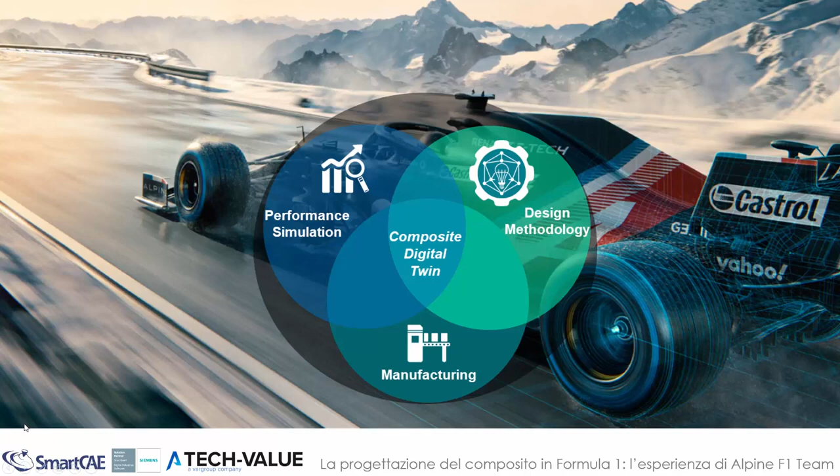Yes, thank you very much for the introduction. It's a pleasure to be here today as the guest, invited to present to you a little of what we do with composites in Formula One. We've been using Fibersim for many years, and I will go into this in more detail and try to give you an insight into how we engineer our composites.

As mentioned, I look after our technical and innovation partnerships, but my history in Formula One was first as a Formula One engine designer for around 10 years, then I moved into composites design, looking after chassis laminates for many years, spending over 10 years on the Fibersim process and chassis design, and then moving on to many other composite parts, as I'll touch on in this presentation.

So very briefly, Alpine. You may better know us as the Renault Formula One team in recent years. For this current season, we are now rebranded as Alpine, the flagship car brand of the Renault Group. Alpine is effectively a standalone brand within that infrastructure, a relatively small sports car manufacturer, but with big ambitions for the future. So this is really the direction we're going.

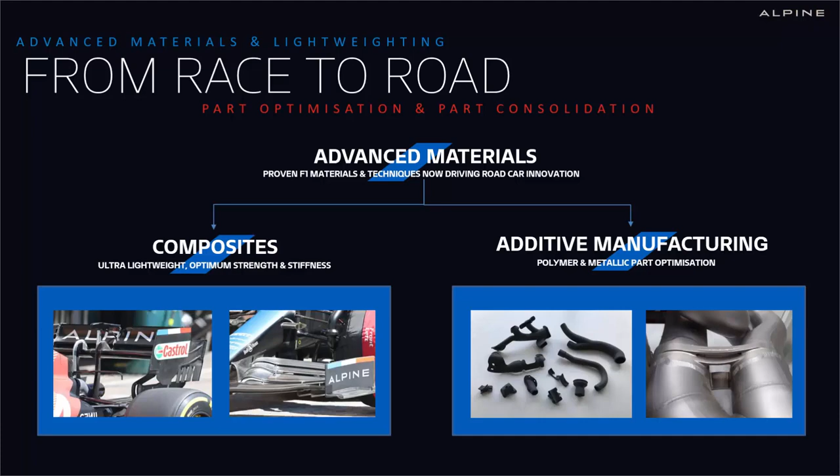But the big story here is composites - the lightest of all, the best specific strength of all the materials, but really the design creativity to do something different. We're not just going to take a metallic part and recreate it in composites. We can actually think very differently and very creatively in how we work with a composite material. And that's really where Fibersim starts to help us visualize this process. But these are exotic materials, right? So yes, they've got a place in F1, they've got a place in aerospace, but what about more mainstream areas? That could be automotive, it could be wider infrastructure, transportation.

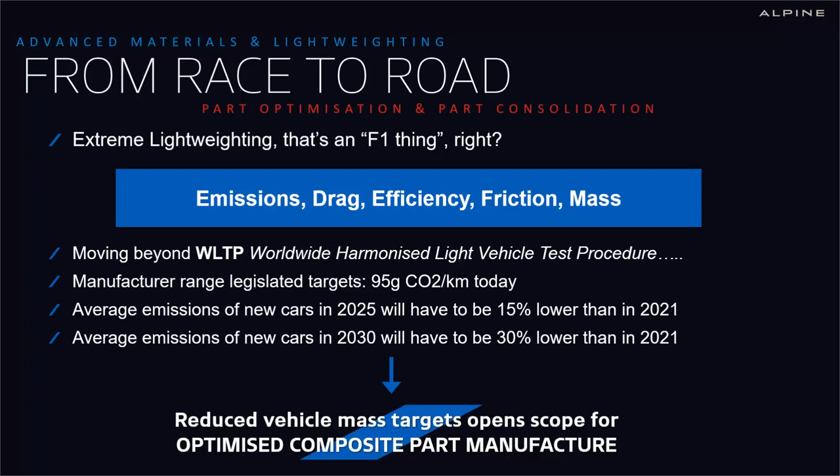I guess this automotive story, as I've mentioned with Alpine, is clearly the direction that the automotive world is taking today - very aggressive international legislation, sustainability, clean emissions, push to electrification, lower carbon emissions from traditionally powered vehicles. All these mean very aggressive weight reduction targets for the auto manufacturers. So naturally, this is where the audience here, representing the composites manufacturing industry, are really in a strong place to help the automotive OEMs looking to make this move to composites. How can you help engineer these parts so that the world's automotive can lose 20-30% of a vehicle's weight? Very aggressive targets, and only realistic if you start to look at something like composite materials.

So let's take a look. What is this Formula One composites process? What makes it so different? How does Fibersim really help us be more creative, really drive that competitive advantage? What does it do for us?

As I mentioned, I've been doing this a long time. I think one of the hosts on this call kindly likened me to the Cristiano Ronaldo of Fibersim. That might be a bit too much of a stretch, but I guess I've been doing it for a long time. Way back in 2007, I got involved, but that wasn't the start of our Fibersim story. I was actually the third Fibersim user in this team.

We had the software, we were kind of getting our heads around what it could do, but what we really thought way back in that time scale was, how do we really embrace this tool? What can we push the limits to? What can it really do to help us drive the performance of a composite Formula One car?

So again, materials, yes, there's lots of exotic materials. Why above all do we put so much emphasis and resource into composite materials? Composite materials in a Formula One car make up about 80% of the F1 car by volume, but that only accounts for 20% of the weight of the car. It's those kind of ratios where you start to realize that engineering investment in composites is so much more important than all of those other exotic aerospace materials.

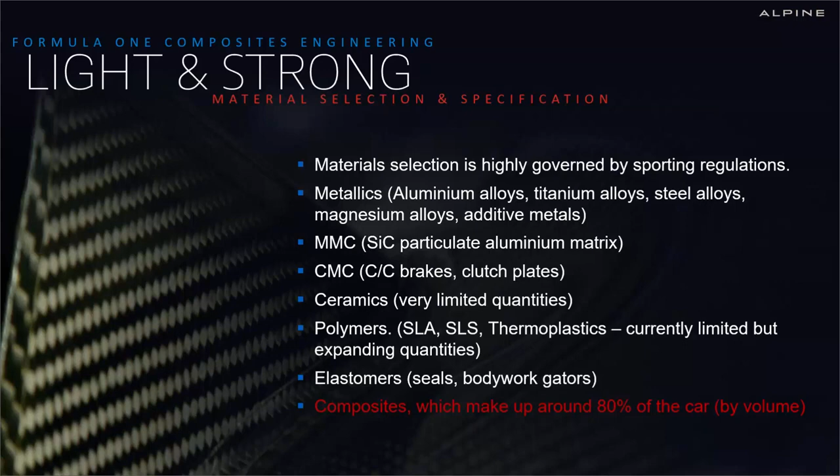Composites really does let you do things differently, as we've obviously come to learn in Formula One. The other big story, if you look back at the history of what we've done with composite materials in Formula One, is how you slowly re-engineer parts to be composite parts.

A lot of this can come down to part simplification, part consolidation. Can I take a traditional metallic assembly of 10, 20, maybe more parts and consolidate those into a single composite part? The geometry limitations, the complexity, the things you can do with the forming of composites really means you can have a fresh look at how you design things.

Obviously part consolidation, reducing the number of individual parts, reducing the assembly, actually helps offset a lot of the costs of the composite materials in the first place. So the net change in cost isn't actually as extreme as you might think when you start to re-engineer composite materials properly through this whole digital life cycle of what the part is.

So the process. What to us is the workflow of composites, and how does that relate to you, the audience, in doing very similar processes? I guess whichever industry you represent, the process will start with some kind of design evaluation. For us, that's the aerodynamic definition of the car.

In our road car industry, this would be the styling process, effectively defining the shape, the form of the finished vehicle before we then start to look at the structural properties in the full-scale design. This is no different to any other industry. We go through design, stress analysis, CAE round trips, the normal iteration to really optimize the design.

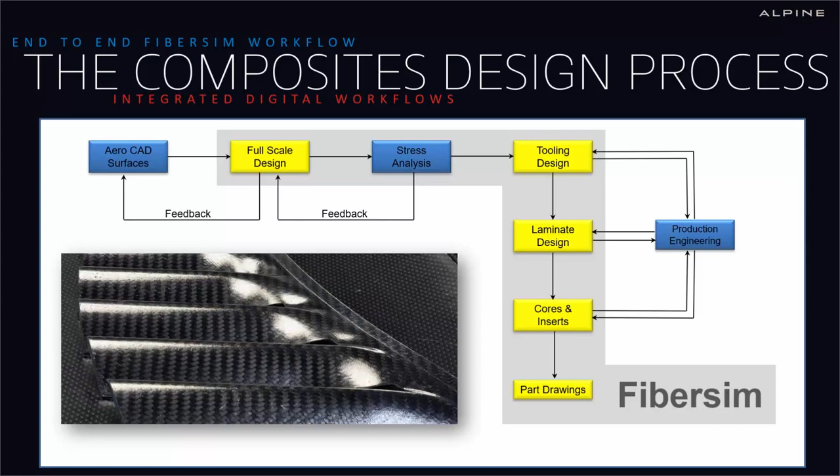And we're no different to you in the way that we manufacture these parts. We're still talking about hand layup, pre-preg materials, very skilled laminating workforces. So you might think that's very non-digital. So what we're talking about here is how to introduce a Fibersim workflow that can really pull in a digital twin mindset, a digital workflow, using all the capabilities that a digital workflow brings you, but to really control and refine a hand layup process.

And we've also got the difficulty of a cross section tells you exactly what happens at that cross section. What happens where one cross section transitions to the next? What happens if it's a complicated 3D shape and you can't really explain it with a single cross-section? This is where a lot of our traditional composites, whether done with this method or hand-drawn ply books, even some of those done in non-CAD tools, it was very much an illustration process. It relied on a lot of skill between the designer and the production team to try and understand what the intent was. It was never clear, it was never fully defined.

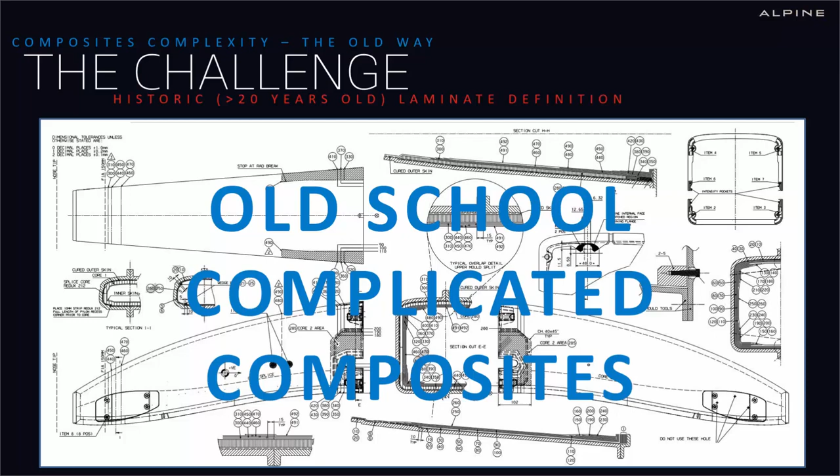We probably relied too much on experience and skill to undertake our composites processes. So yes, this is very old, but it was clear there must be a better way to do this. And that's really where, for us, the solution was Fibersim. So how can we get that level of detail in a very methodical, very controlled workflow where you don't need to be the most experienced laminator or designer in the world? We can have consistency, reliability, quality, repeatability. And that was really the mindset of let's take on Fibersim.

Let's really push what we can do with this. And not only do the design process, but also, as I mentioned, how can we integrate that manufacturing workflow? As everyone knows, within composites, it could be laser placement, flat pattern templates, nesting software, cutting machine integration, automated manufacturing systems. There's so many third-party systems that you want to tie in to effectively define this composites process. You clearly need a very powerful system that's designed around this composites mindset.

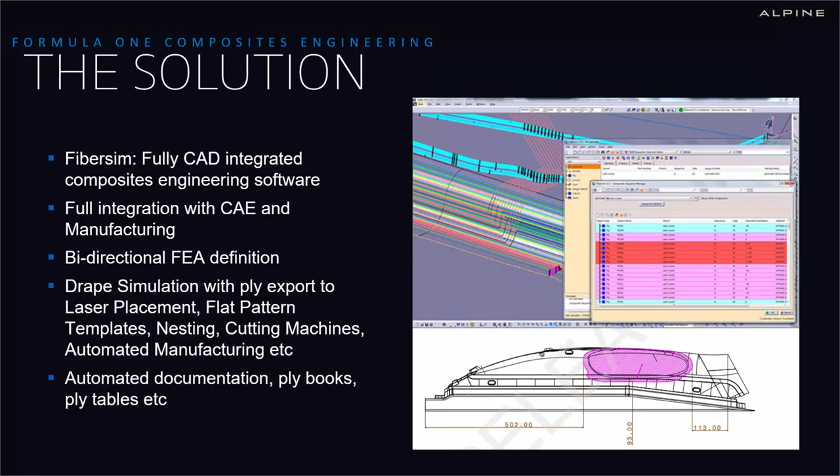This wasn't an instant journey for us. We're very cautious in Formula One. We've got a lot of experience. We don't always believe that everything's going to be better than we know, I guess. Maybe we're a bit stuck in our ways in that regard. So the Fibersim story was very interesting to us. The idea of digital simulation and digital workflows were very new.

If you think back 20 years, 15 years ago, today they're the default. So really this was, I guess, a very early digital workflow. So how we started with this is we took on the most difficult job that we do, the Formula One chassis. The chassis is around 1,000 individual plies of material, insanely complicated geometries, lots of material, lots of optimized patches of laminate. Clearly that was so difficult, we were starting to realize we couldn't do this without a dedicated specialist tool.

So if we look at the period up until 2007, Fibersim was just for the chassis. Let's just let it work on the most difficult job that we cannot do without it. That then established the workflows, the way we work, so it made sense. Hey, what else can we do? If it makes the chassis easy, can we apply that mindset to other things?

So the transition period then was the 2007 to 2015 period. This was when I got involved and started to really see, could we look beyond what the chassis design team do? And this is where we started to look at all the other structural parts, the wings, the bodywork, the suspension, the crash structures, and really refine those Fibersim methodologies in a scalable way that we felt comfortable with. Again, there's a lot of history, a lot of processes to transition. So this is a really progressive way of defining how should we do composites, because Fibersim can really help support that change.

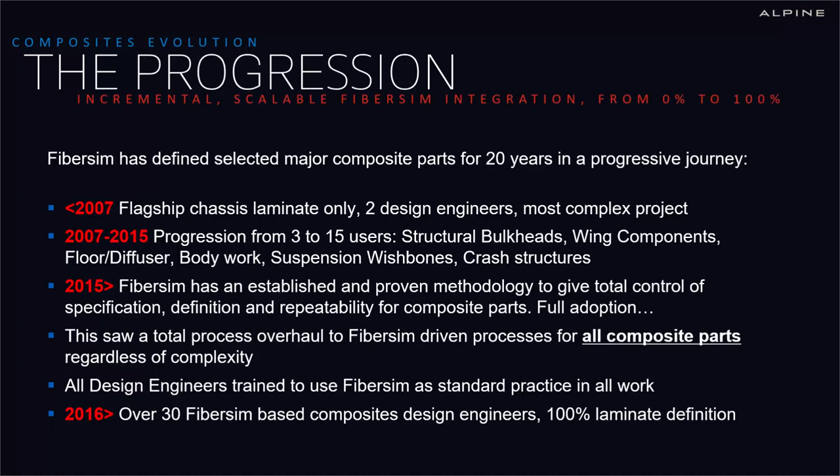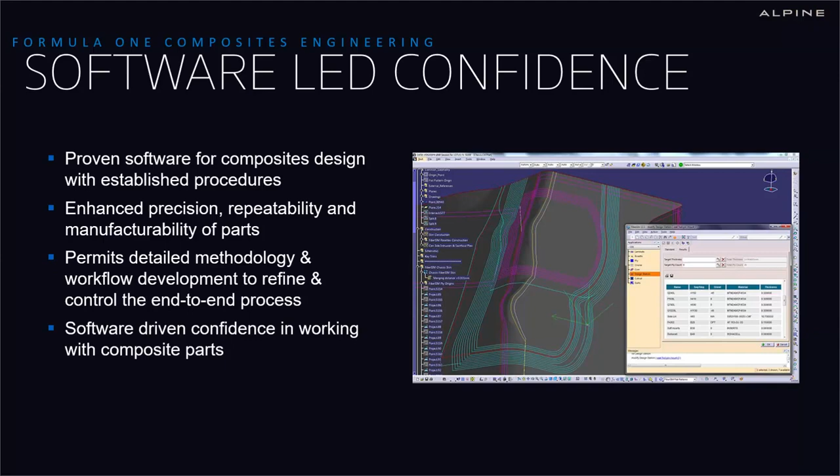This is obviously a software-driven process, and it really does give that quality and consistency. What we did with the implementation of Fibersim was really control our workflows by bringing in very specific methodologies, very specific ways that we define the process. This is what actually helps us define and control the hand layup process, really bringing digital methods into human-interfaced manufacturing.

Another big important feature of Fibersim, which is unique compared to its leading competitors in the marketplace, and again is really a strong point, is the open architecture. I mentioned that the composites workflow touches so many different manufacturing methods and processes. You really want to be able to integrate with either the best in practice solutions you're looking at or existing infrastructure you may already have. You don't want to be forced to have a single shop source where you have to have all of the tools when it makes sense to have this open architecture mindset. So this is where Fibersim is very class leading, but offers all of the integration you need for your choice of nesting, cutting, lasers, material management, all of the third-party tools that really support this true digital twin workflow.

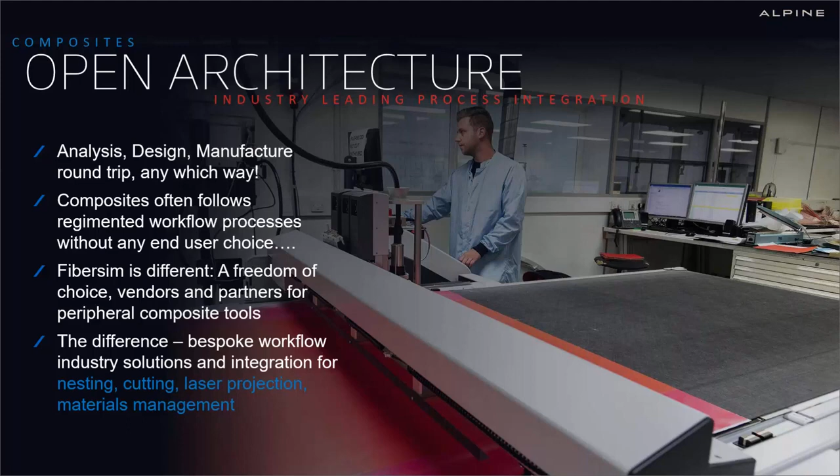As I mentioned, we're hand layup. So I guess that's very much like the user base on this call. We've got a very large facility - you can see the image there, that's about 1/3 of our in-house clean room facility. 80 laminators, full digital workflows, so all of the documentation is on the screens. You can see large touch screens with ply books generated in Fibersim. All the documentation is digital, meaning we can update it seamlessly, automatically. Laminators can work in different areas of the room and access their work.

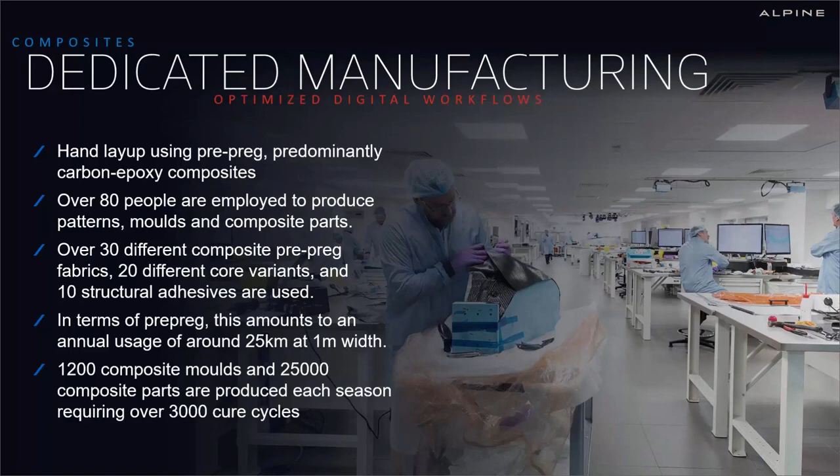We're a big facility, over 80 full-time staff, 30 different materials. We use something like 25 kilometres of material a year to produce 25,000 composite parts. The turnover in Formula One is immense, as I'm sure you imagine, the pace we upgrade the cars through the season. It really does mean that it's a very large in-house facility.

So this end-to-end workflow, I've given you the context, but I can't go into too much detail - let me try and give you a flavour of what the Fibersim process is. We're now going to take less than 5 minutes to do the full design of a Formula One diffuser. You're all familiar with the floor of the diffuser of an F1 car, the great big piece under the full length of the car, probably 2.5 metres long, diffuser exiting at the rear, around 200 or 300 plies of material in here, and it's a fully consolidated closed mold laminate. So can we really design this in 5 minutes using the Fibersim methodology?

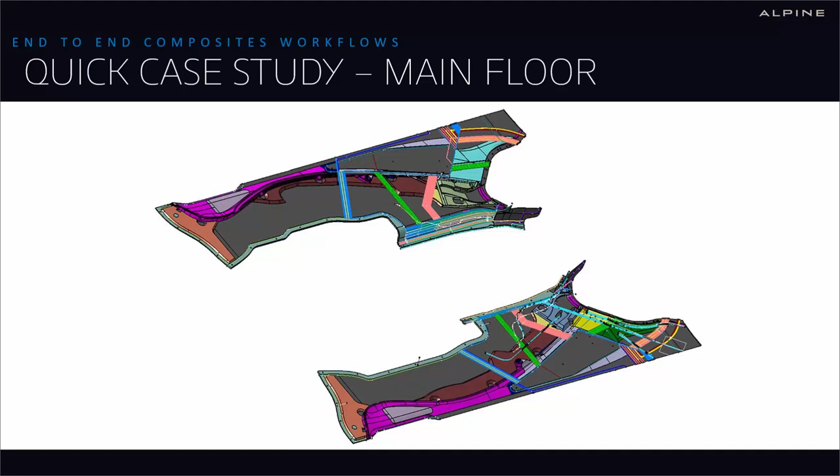Let me show you. The first thing we do is we have a CAD surface - this is our aerodynamic or styling surface, as you want to call it. We can take this very early on in the design process. We know some of the tooling limits, we know where we want to split the mold, where we're going to have some different features or edges. We can really start to define the basics of what the geometry will look like before we even think about the laminate.

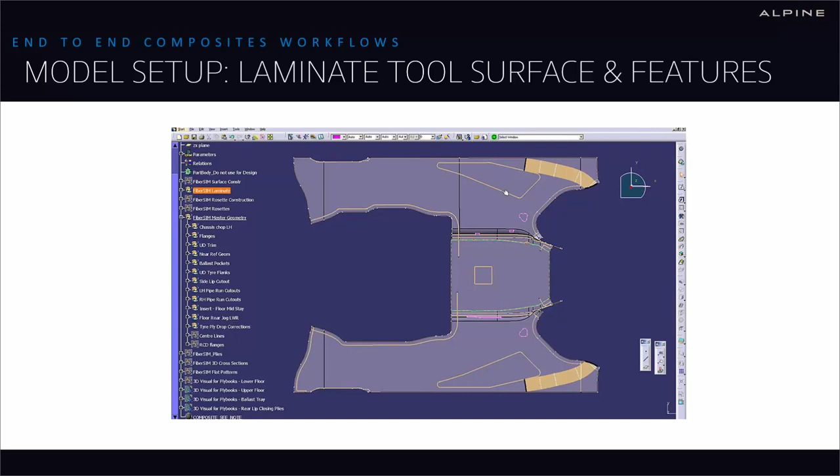The stress team, the CAE engineers, will obviously be working on the laminate definition, trying to understand what the aerodynamic loads will be, what the FIA load tests need to be. So we can work with the CAE team to define a laminate. This is split between the design team and the CAE team. The design team work with Microsoft Excel to draft how a laminate will look. They also work with the stress team who are working in ways to define the laminate, the materials, the geometry, and we can basically import that very seamlessly, very quickly into the CAD workspace.

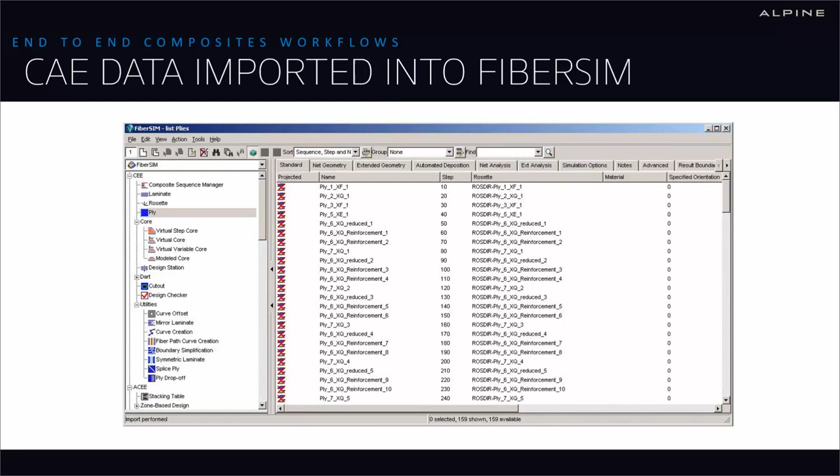We now have the starting of a CAD laminate. What we need to do here is define the ply boundaries. These have been digitally imported from CAE. We can now refine, tidy these up, maybe add in some ply drop-offs, some automated functionality again that Fibersim can help create for us.

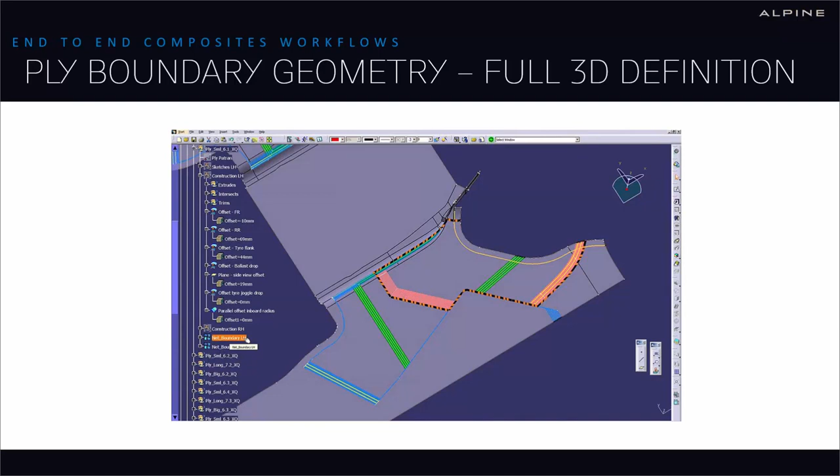So some very simple ply boundary shapes can start to be defined on the 3D surface. The next step, think of it like cookie cutters. We want to intersect some very basic geometry to define what the ply boundary will be.

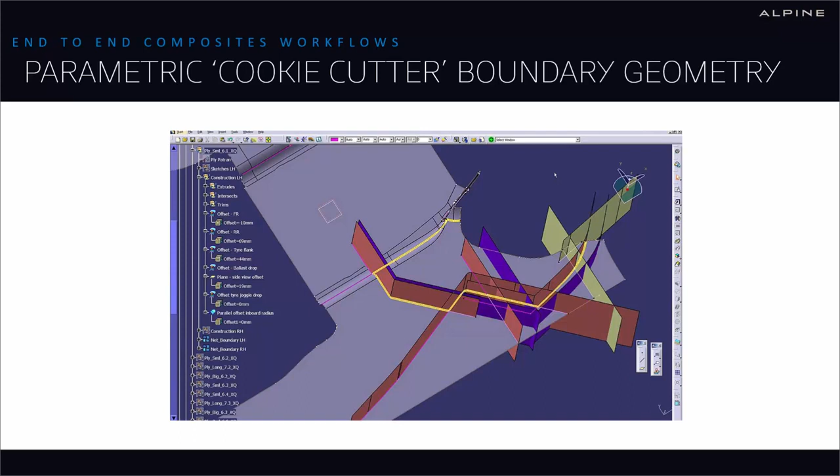You can see the ply boundary in yellow on the screen, and we've got these very simple extruded profiles that are parametrically offset to define those ply boundaries. It might look complicated at this stage, but what we're really doing is just intersecting basic geometry so we can get some very, very defined ply boundaries.

So what you can see here, again, we've got the yellow ply boundary we've just constructed. Because it's parametric, we can offset it in different directions by different amounts to get these very controlled, automated drop-offs. Fibersim is very advanced in helping you specify drop-offs on different edges of parts. This is an automatic feature that lets you define very complicated but very controlled laminates.

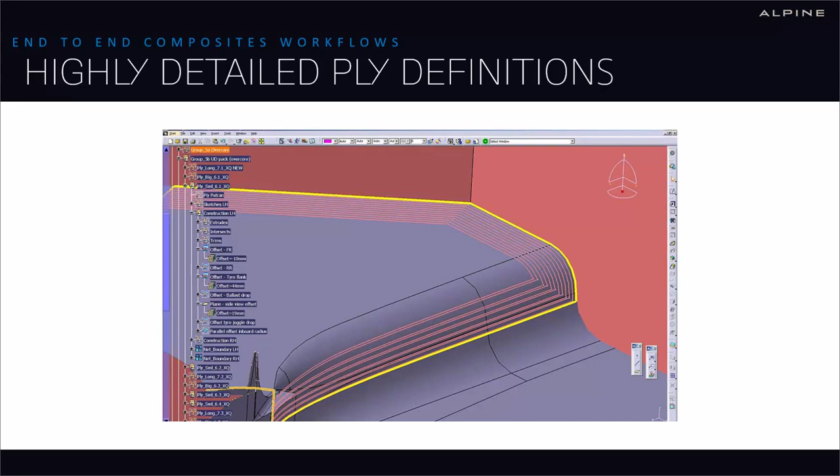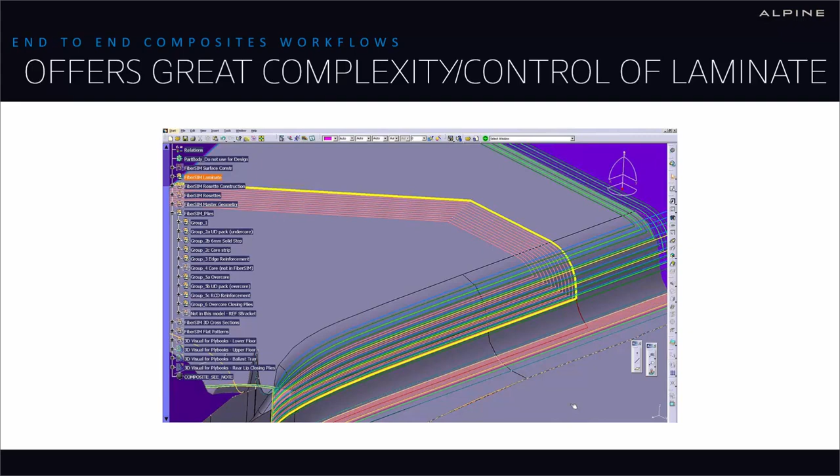This is the inner laminate, or the undercore laminate. We can then overlay the overcore laminate, and again you can see the resolution and detail we can have here. We can nest the overcore laminates in between the ply drops of the undercore laminate - levels of detail and definition that just wouldn't be possible in that old school cross-section hand-drawn ply book approach. So what we're doing here is very, very complicated but very refined ply boundary geometry.

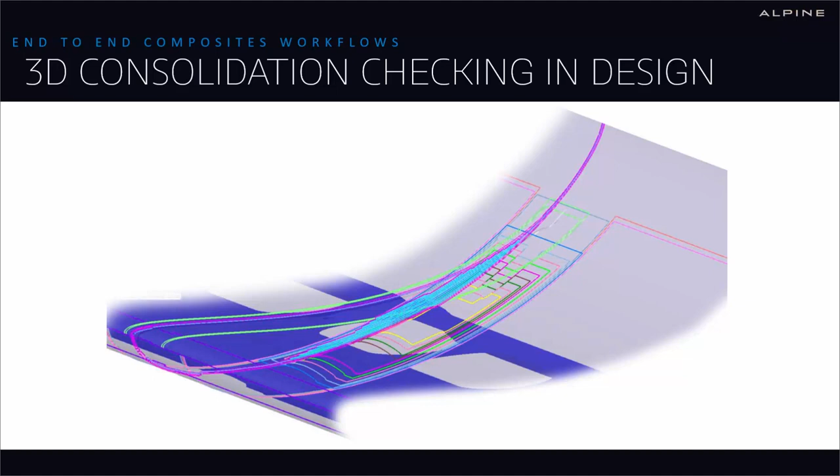What our manufacturing team also do is they have the ability to use the 3D CAD and create their own cross-sections. If they want to look at a piece of geometry and understand what the laminate looks like, they can. Again, it's the flexibility that this digital model gives you at all stages through that design and manufacturing workflow. The next stage in our 5-minute 'Let's Design a Floor and a Diffuser' is the documentation.

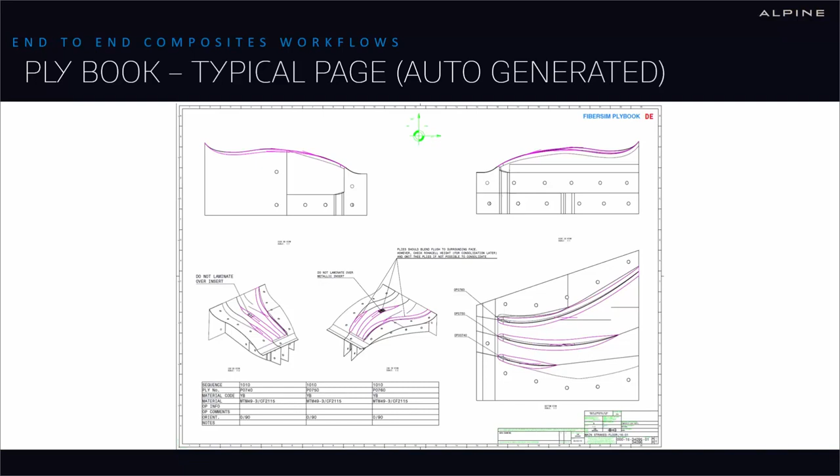Rather than the complicated drawing that you saw of the nose from 20 years ago, we've now got a very logical step-by-step manual. Just like your IKEA handbook or your Lego manual, we've now got a Formula One car that you can build with a Lego-style manual. Very simple, very clear, controlled lists of the plies you fit in each stage - no margin of error and guaranteed repeatability and accuracy.

Along with this, we've also got an automated ply check sheet. This is a list used for sign-off as the laminator creates the job, but it's also used as a material checklist. So very quickly, we can generate a checklist like this, give it to the cutting room team, and they can have a quick look at the materials they need, the different material types, and any special operations that go in there.

Using Fibersim, we can also get a very quick estimate of the length of material likely to be needed for this job. So we can allocate markers and material rolls very early on in the process, before we've even started the templating.

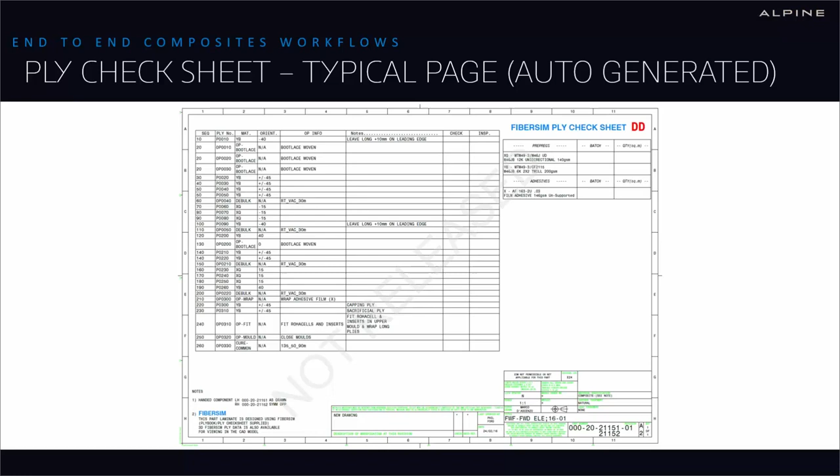Now to give you a very quick flavour of templating. A big part of working with carbon fibre is how long it takes you to prepare the templates. We all know carbon fibre material is very expensive - well over €100 per square metre for the kind of stuff we use. It's expensive, you want to get your templates right. So that needs a lot of confidence in taking the 3D design and creating 2D templates from that.

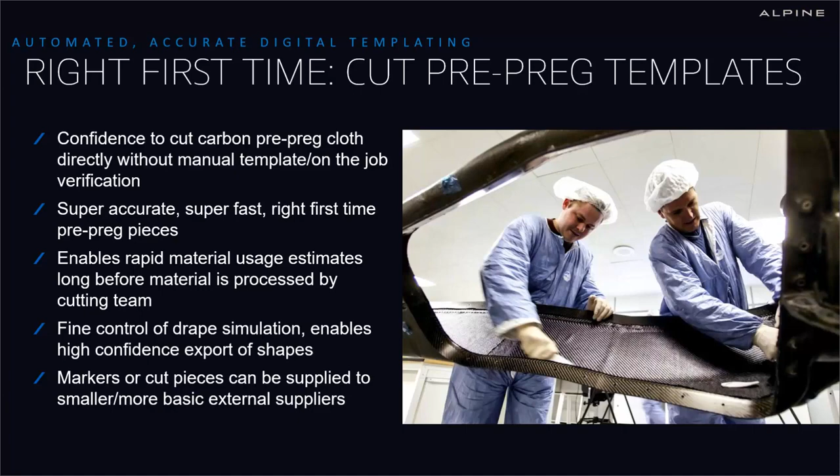The traditional way is for the laminators to prepare paper, tape templates on the job. That's very slow, very time consuming. We want to do it digitally, but we want to do it digitally right first time. Fibersim is the way to do this. We now 100% digitally template all of our work.

No manual templating, no verification of templates - Fibersim does it, we hit cut on the cutting machine. Very direct, very quick. The reason we've got this level of confidence is we've been through the optimization. Fibersim gives you very simple drape simulation tools.

So if we start with picture number 1, that was what the stress engineer intended. We know we can't actually make that. Fibersim shows us we can't make that. The yellow and red bits mean it would be very challenging to try and create that part. This is actually a big piece of material on a Formula One chassis, so you can imagine it's quite a big piece of material to work with. You want it to be going down well.

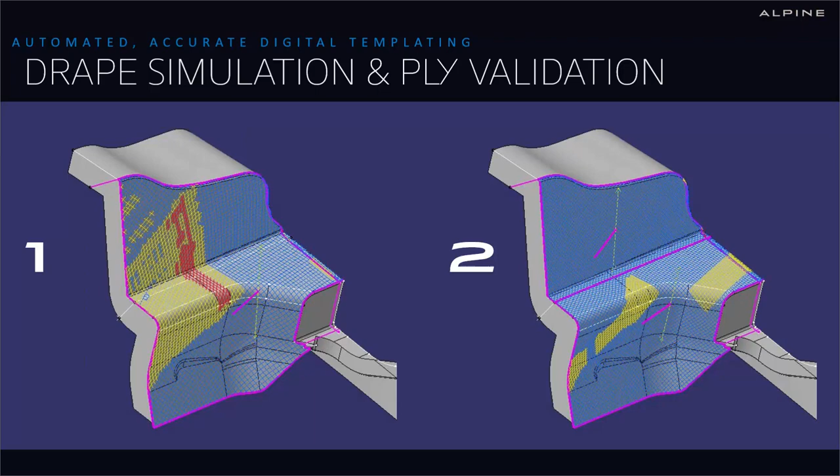Picture number 2 shows the same geometry split into 2 plies. Very quick thing to do, and we can see that we've already improved the manufacturability immensely on that. We can talk with the stress engineers, we can understand if that's acceptable.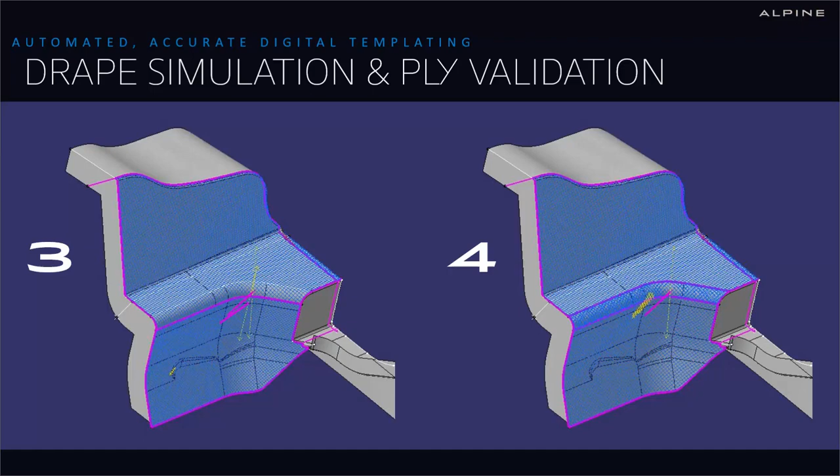Picture number 4 goes one stage further. We've now taken what we've done with number 3, but we've added an overlap just to make sure that we can split this ply without any structural degradation. We've overlapped the ply. So we've gone from picture number 1 to picture number 4, which gives us the total confidence that we can now manufacture this. Very quick, very simple, and this works for very big parts, as you can see.

So this exact process: we take the chassis mold in 3D, we do the drape simulation in Fibersim, we create the templates you see in the bottom left of the screen, we take those templates and we then directly cut them into the pre-preg material you see the laminators working with to fit into the mold. This gives us the super fast turnaround you need in Formula One, but also the very accurate repeatability that every chassis we make is the same. Those plies are being positioned using laser ply placement, so there's no margin of error, completely repeatable.

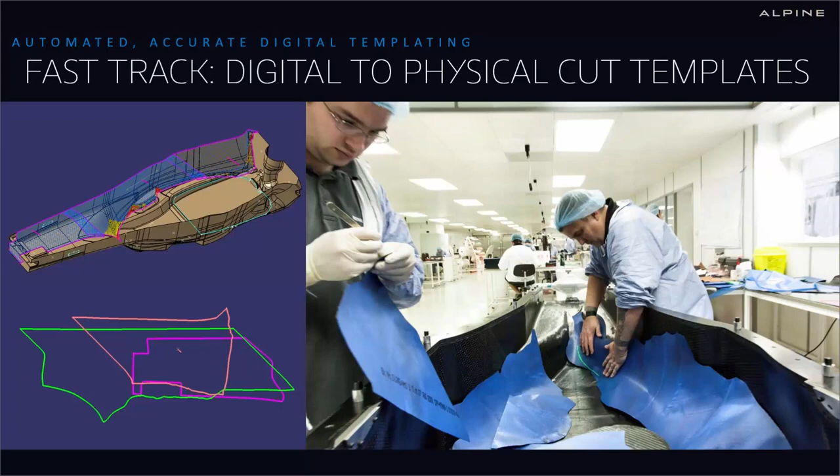When it comes to the flat pattern shapes themselves, again, something that's unique to Fibersim is the ability to nest groups of plies using the same origin point or seed point for your simulation. Other software utilities let you create templates, but no other software utility lets you nest them in this way. And again, this is a big part of giving our laminators confidence in Fibersim templates. If you can nest all the plies together using the same seed point, the laminators can see the plies and they look as they are expecting.

If you use one of these interactive simulation tools, the plies might not necessarily all sit together happily like this. They might have different curvature, different shapes. They'll still work, but it just doesn't give our laminators the same confidence as the Fibersim method that you see here.

I mentioned 100% accuracy. What we're doing with our plies, some we send down as net shape, but some the laminators actually ask for them to be oversized. Sometimes it can be easier to have maybe 3 net edges perfect and 1 edge oversized, just so they're not trying to fight it or pull it to a mold edge where the shapes are really complicated.

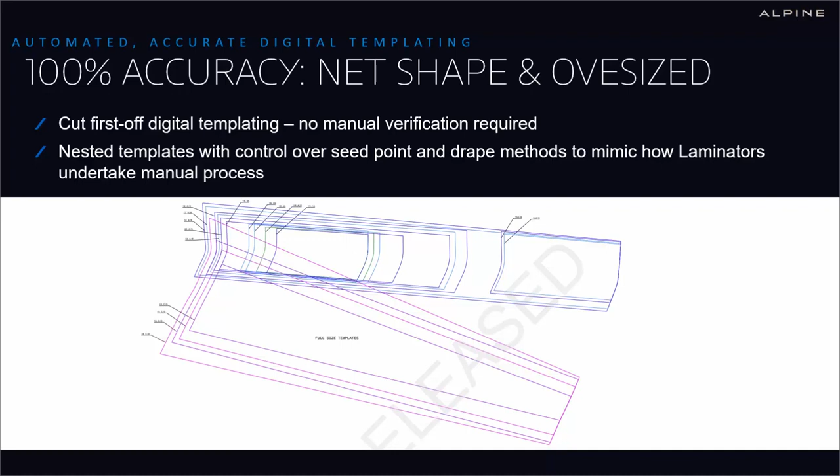So again, within Fibersim and by learning together with our manufacturing teams, this is how we get to 100% accuracy, using net shape patterns where required and oversize if some of the shapes are really challenging. Giving a laminator a net shape template could actually slow down the process compared to giving a slightly oversized piece of material that still trims to the job. So again, be flexible with your mindset in how you use the templating, and you really can get this 100% accuracy straight to cut cloth process.

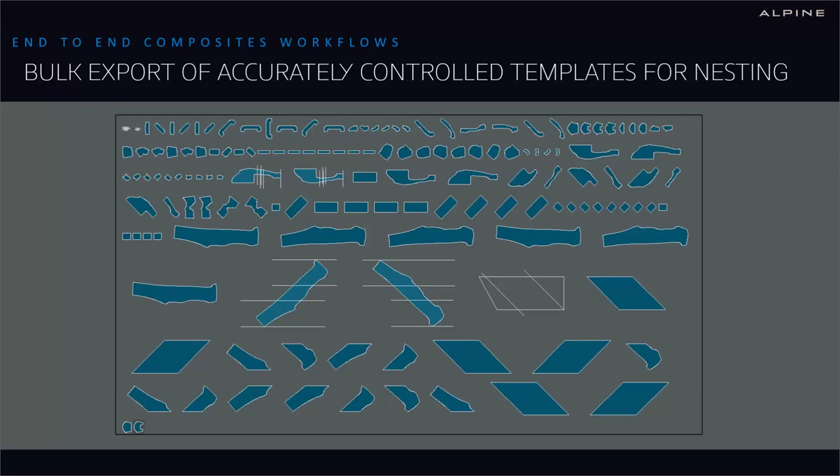This then all gets automated into the nesting. So again, a single button export feeds our nesting software, and the markers and the templates can be prepared for cutting. So again, very quick manufacturing jobs there. And that gives us a very, very quick walkthrough. I appreciate that was quite a lot to give you in such a short workflow.

But what really are we talking about here? The big part of this process is this end-to-end integration. It doesn't matter which department, which role, you've got access to the Fibersim model, so everyone is seeing the same data. And this is really important for us to have this consistency and repeatability going through digital, the documentation, right through to the markers, the flat pattern, the templates. We've all got the same way of looking at the parts.

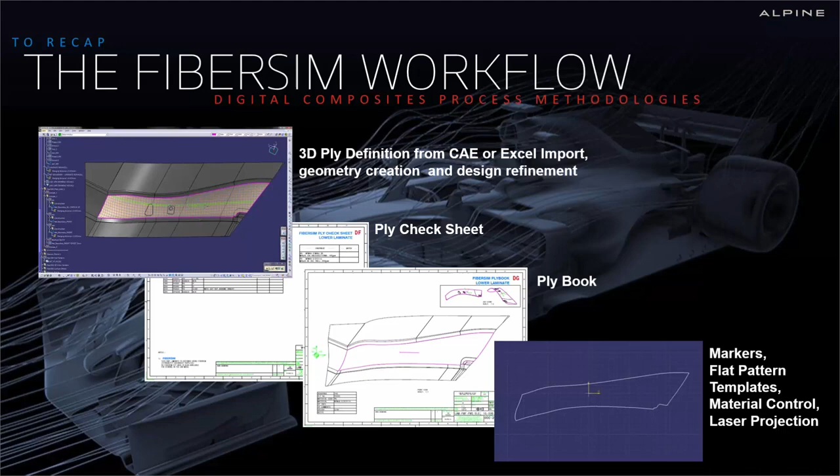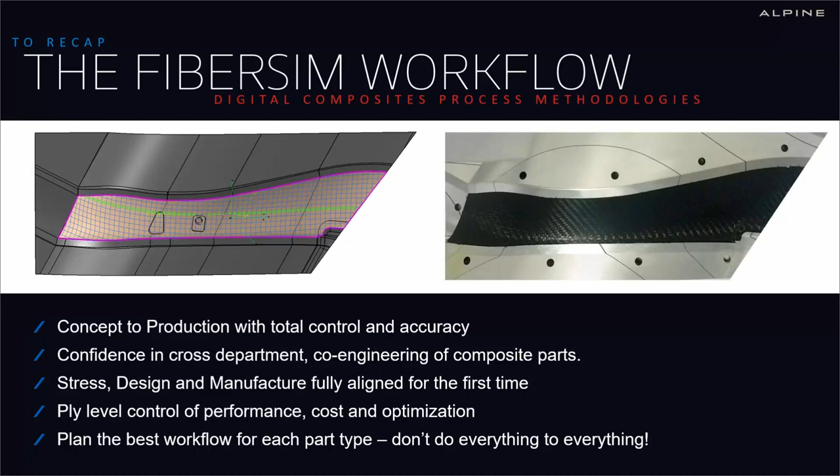The big part here is this kind of digital workflow, the closed way of just controlling everything we do. Fibersim really drives this end-to-end process, but brings in the third-party tools, this open architecture mindset. We can use the best process and best practices from each department to really drive this Fibersim integrated workflow.

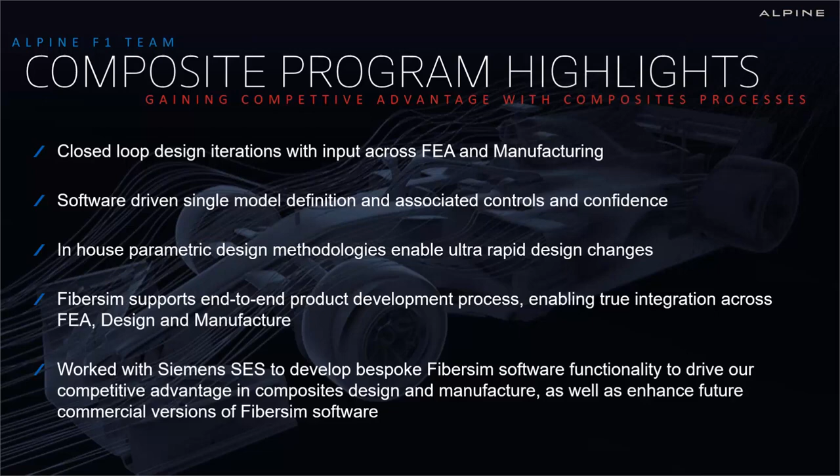To sum up, and this is really where some of the biggest metrics are, what did we actually gain by this long transition from those very complicated hand-drawn illustrations to a now total digital, push-button ready-to-go Fibersim workflow? The overall development time reduces by around 60%. This digital sharing of the ply boundaries, the templates, is a real game changer in terms of the workflow.

To take one example, that CAE import process into CAD used to take us 2 weeks for a race car. Very intensive, manually translating geometry files in 3D from stress tools to CAD tools. With Fibersim, you push a button, it takes around 2 hours, job done. 2 weeks to 2 hours, you kind of get a feeling why this might be worth looking at.

The design time itself, we genuinely save around 20 to 30% of our time there. You may spend a little more time in 3D defining the plies, but the payback in the game with all that automated documentation is very significant.

The laminating time, because we've removed all the need for manual templating, we've got digital cut templates put straight in the mold, positioned by lasers. That really was a game changer, something like 80% reduction in manual versus Fibersim controlled workflows. And again, I won't run through all the metrics in detail, but it's that kind of saving.

I guess the biggest consistency of all is the consistency of the parts. The weight variation dropped by a huge amount, but the repeatability and the positioning of the plies also became much more accurate. That is part of the round trip story, and that gave our designers and stress engineers much more confidence to reduce safety factors, reduce knockdown factors, reduce margins on what we're trying to achieve.

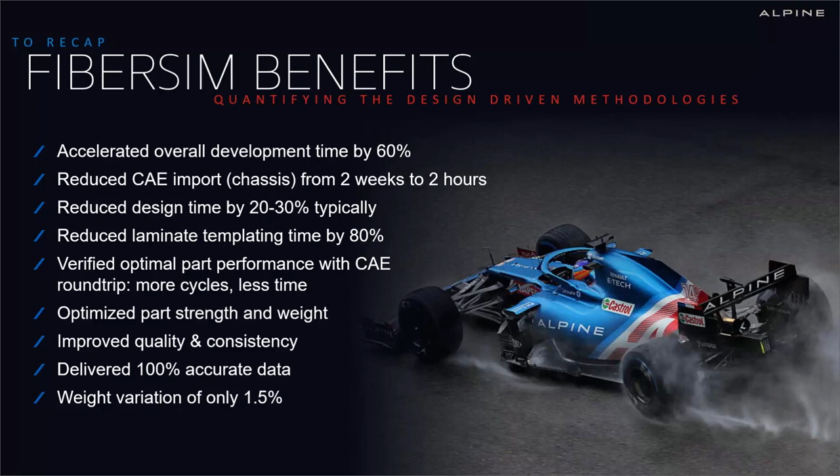Thank you, Ian. Thank you very much for your presentation. I found a lot of very interesting hints and suggestions on how to improve the workflow of composites using Fibersim.

I'm taking back the control.